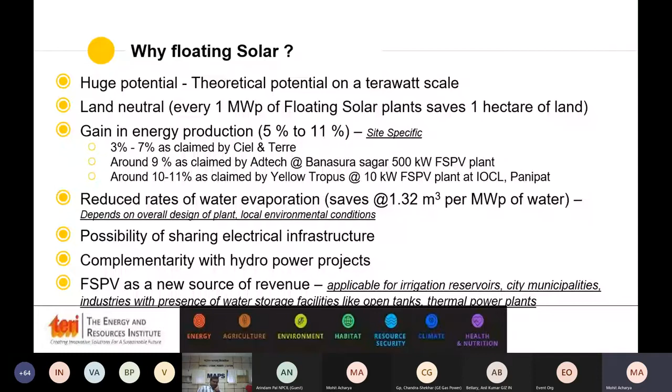Globally, the technology has reached a level of around 2 gigawatts of installation. If you look at a more detailed analysis, out of these 2 gigawatts, majorly almost 94 to 95% has been installed in Asia.

This has been installed in Asia, led by China, followed by Japan, South Korea, and Taiwan. Interestingly, when the technology was getting recognized earlier in countries like Japan and China, project capacity was in the range of less than 2 megawatts to 5 megawatts. But now larger projects have started coming up.

This reference has been there in India as well. These are a few companies who provide services like project development, anchoring and mooring supplies, or floating structures for this technology. The major components of this technology, different from ground-mounted or typical rooftop PV plants, are the addition of floating structures and anchoring and mooring. Apart from that, PV modules, inverters, SCADA systems, and transformers are all there, as in a typical solar power plant.

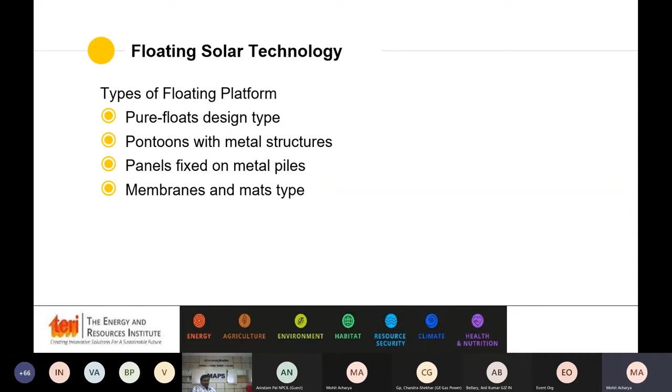Now, just to give you an idea about what type of floating platforms are being used in most projects right now, they can be categorized into 4 types. The pure float design, which is famously and majorly used in projects right now, basically utilizes especially designed buoyant bodies which support the PV modules.

You can see this type of technology in almost every project coming up right now, with different technology providers or suppliers for this. There's Hydrelio designed by Ciel et Terre. There's one more Japanese company who supplies. There's Sungrow, and one more Indian player, Yellow Tropus, who previously supplied this kind of floaters.

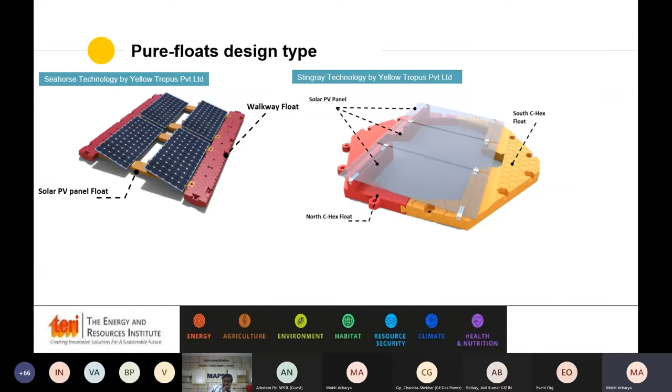Moving into the second type, the floating panels or solar modules are mounted using metal structures and pontoons. This kind of supporting structure came up in the earlier days of this technology and has been used in some projects in Japan as well as in the Netherlands. You can see here that the solar modules are mounted with the help of a metal structure on pontoons, which are used to provide the buoyancy force.

The third type, I could not refer to as floating, because in this case the entire floating solar panel assembly, in addition to the other components, has been fixed to metal piles. This particular type provides a very good opportunity to co-locate floating solar panels for generating clean energy while co-locating with fish farms and other uses of that particular water body.

There are a few projects which have been installed in China. The picture you can see is of a 100 megawatt project in a fish farm in China. The only difference here is that because of using metal piles and metal structure, the overall cost of the project may increase. But you have to choose based on the actual requirement of that particular project. If the fishing happening at that water body is generating a lot of revenue, then you can balance out clean energy generation from that area, as well as open up revenue generation from other sources.

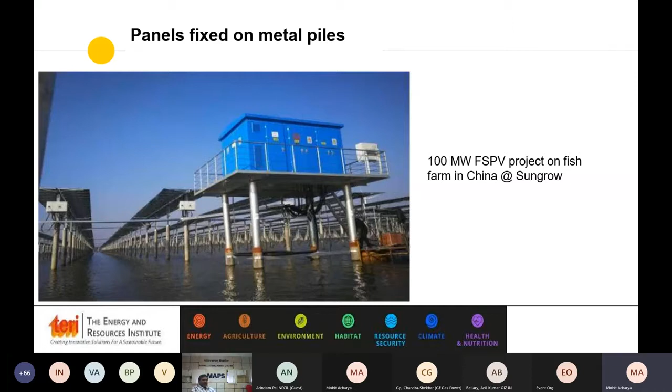The last part is basically a membrane type or mat type, in which the platform is created by covering the entire water surface with rubber mats. Basically, this type of membrane technology is particularly suitable where the water body has a lesser area, like in the case of an industrial pond, where you can cover the entire water body area.

Now, since floating solar technology is installed on the water surface, it is important to understand what role a water body plays, what type of water body it is, and what the purpose of that particular water body is. Again, it is divided into further categories. The first one, generally considered a low-hanging fruit, is the static kind of water body. These are water storage reservoirs used for industrial or process requirements, or mining ponds or water treatment ponds.

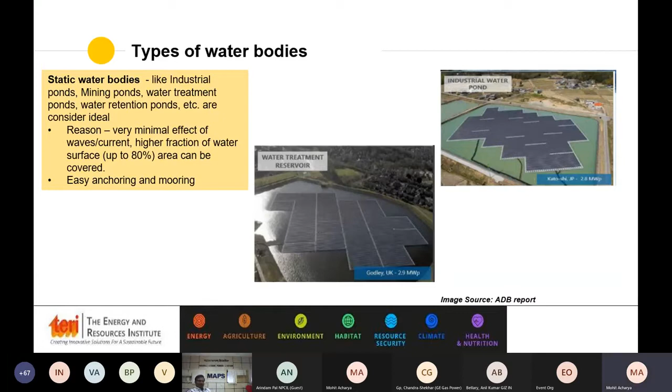The other type is large water bodies, for example hydroelectric dams or irrigation reservoirs, in which risk is moderate. This is because the area of the water body is generally high, and because of wind, wave and current effects, there could be a cyclic fatigue load coming on the floating panels and other components. Also, there is a chance of water level variation and water depth variation. One has to look at the distance from the shore, and do a thorough study of bathymetry and subsoil investigation.

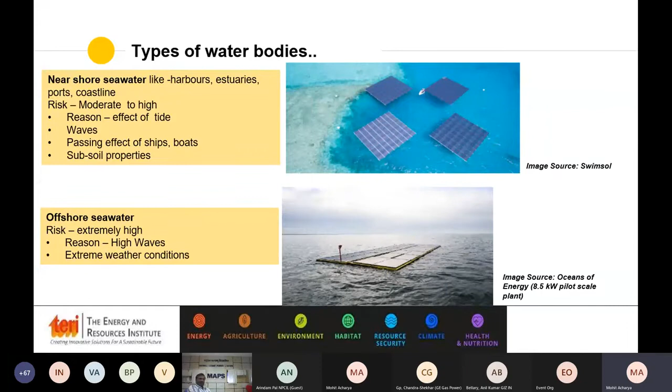The other type is near-shore seawater cases. These are particularly near harbors or lagoons near the coastlines. Here also the risk is moderate to high, mainly because of the wind and the effect of tides and waves, and also if the lagoons are near ship movement, then one has to consider the passing effect of ships and boats as well.

The last one is offshore, which looks at installing this type of technology at seawater. Till now, only very few projects have come to the concept-to-commission stage, and around 50 kilowatt to 100 kilowatt has been installed in a few parts of the globe. Currently research studies are underway on how the longevity of this particular technology can be increased, particularly in these extreme environments.

You can see a few of the projects which have been installed across various countries, like 150 megawatt in China, which is the largest plant installed in the entire world, of around 150 megawatt.

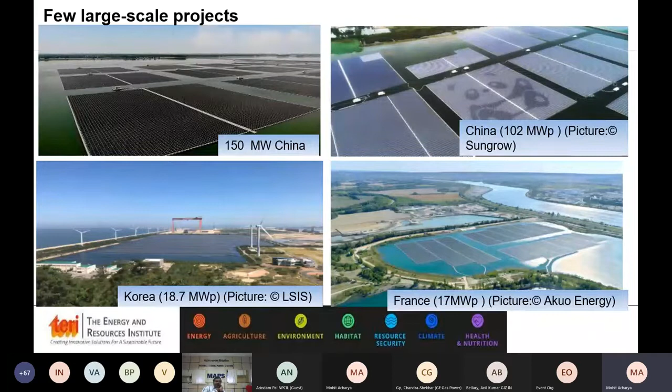Coming to the cost side, as we have seen in the case of ground mounted or rooftop systems, the cost of floating solar technology is also getting reduced as the technology matures. The interesting point to note here is that India is already discovering lower costs as compared to other countries.

Moving into the Indian status, till now 9 megawatt of capacity has been installed, and almost 450 to 500 megawatt of capacity is in the development or pipeline stage. A few of the tariffs discovered till now: last year for the Rihand Dam, for 150 megawatt, we discovered a tariff around 3.36 rupees, and last year the Bihar Municipal Corporation discovered a tariff around 4.15 rupees.

Recently, in Andaman and Nicobar, India's first floating solar plus storage project came up, and the tariff or levelized cost of that was in the range of 7 to 8 rupees, if I remember correctly.

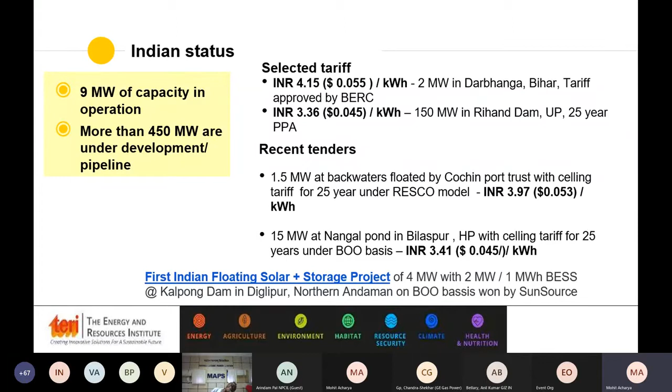Now, with the support of the Energy Transitions Commission India, TERI has undertaken a study in which we looked at the state-wise potential of floating solar technology. We identified more than 2,000 large and medium reservoirs, and conducted a thorough analysis of how much potential is possible for each reservoir. Through this study we came up with an estimation of around 280 gigawatts of potential achievable from this technology. The cumulative surface area of the reservoirs we identified is around 18,000 square kilometers.

You can see the state-wise potential over here, which is led by Maharashtra, Karnataka, Madhya Pradesh, Gujarat, and Rajasthan. Further, each and every reservoir has been estimated under two different scenarios, in which each reservoir has been further categorized based on their purpose type.

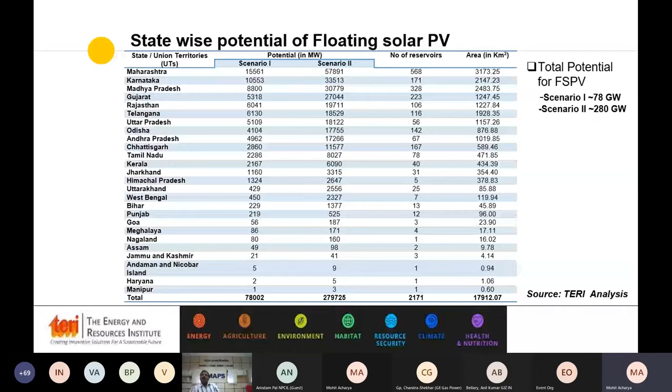The basic approach, I won't go into very much detail, because this particular approach has been well explained in the report which was released earlier this year, and I request all of you to please go through that report, and you can see what approach we have used, and what type of actual project design steps one has to take.

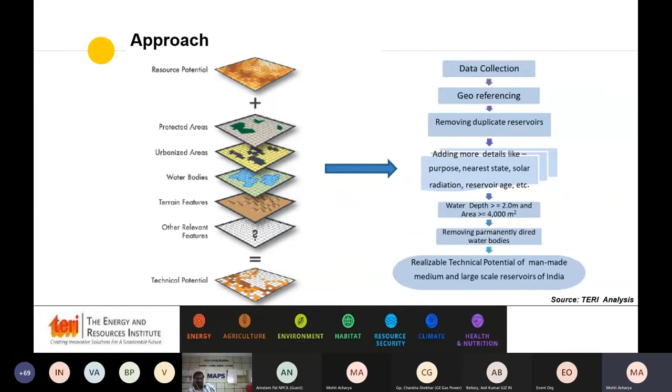Now coming into the project design guidelines, as compared to ground-mounted projects, over here I would say the feasibility stage or due diligence step is the most important one. The reason is that very limited know-how of this technology is available, and floating solar projects are more site dependent as compared to ground-mounted or rooftop systems.

So one needs to do a thorough study of how the water surface area has been changing historically, how the water depth has been changing, if a reservoir is larger, what the waves and current profile of that particular reservoir is, what the wind is, and what the bottom topography of that particular patch of the reservoir is. So one needs to do a thorough study.

It starts first, if you consider any site, with the help of GIS software, one can identify how the water surface area has been changing, and identify the patches of suitable area where the floating solar panels can be installed. Once those patches have been identified, one can do a detailed bathymetry and hydrography study there to find out the bottom topography.

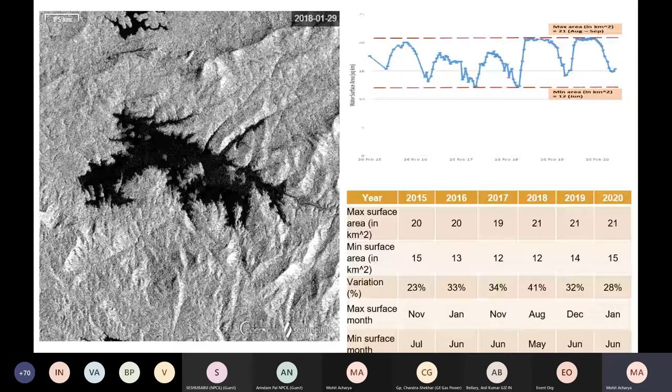Once that patch has been selected, you can go for further studies like bathymetry and hydrography. So ultimately, from the GIS study, you need to find an optimal water surface area. If the reservoir is very large, that patch should not be too far from the shore, otherwise it will increase the cabling cost and other component costs. It shouldn't be too near to the shoreline, otherwise there might be chances of drying up in the lean season. So these kinds of steps are much needed to undertake this type of technology.

Now suppose I take an example: you have a reservoir of around 100 square kilometers. Out of that 100 square kilometers, through a GIS-based study, you have identified 5 or 10 patches on the reservoir surface where you can see that water coverage is there almost entirely over 10 to 15 years, and water depth is also in the range of 10 to 15 meters.

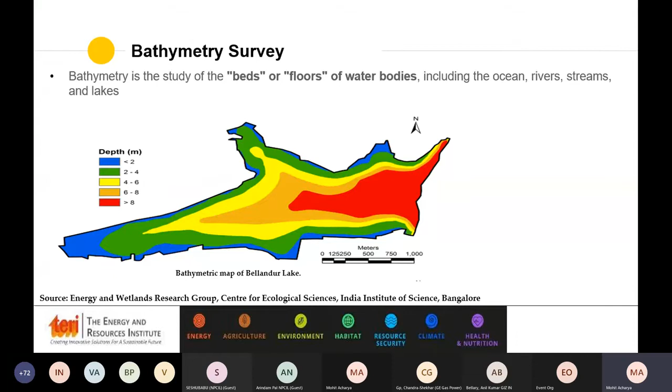So once you have that data with you, you can use the bathymetry study to find out the exact topography of the bottom surface which is there beneath the water surface. Now again, bathymetry has been done with two types of technology. That is, one is single beam and the other is multi beam. Each has their own associated cost with them.

So over here you can also devise a methodology that out of 5 or 6 patches you have identified, you can first conduct a bathymetry study with a single beam because it costs less. Once you have a better understanding of the exact profile of bottom topography over there, you can select 2 or 3 patches out of those 5 or 6 patches,

and then on those selected 2 or 3 patches of maybe around 10 square kilometers out of 100 square kilometers, you can conduct a multi-beam echo sounder survey, which can provide you much better resolution, and which can be used at a later stage for designing your anchoring and mooring points and so on.

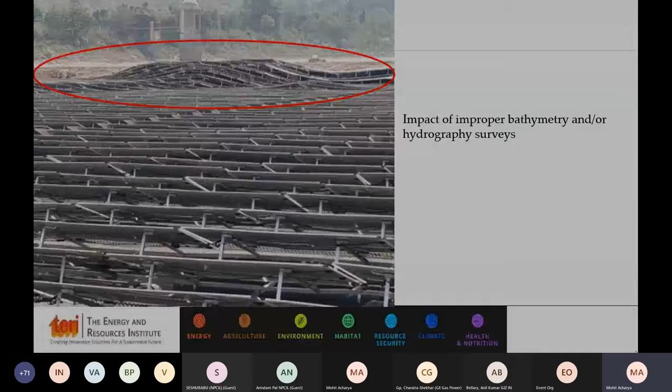The other important part that has been emphasized by SS Mishra ji as well in his presentation is the plot size. We have to understand that in principle the initial design phases of floating solar PV projects are a bit different compared to a ground mounted one. In a ground mounted one, each row acts as a single unit. So drag force because of wind is lower compared to what could be there in the case of floating panels, because each joint is interconnected, and it acts as a single unit, a single plot. So the plot size plays a very important role over here.

A larger plot size can lead you to a high number of anchoring and mooring lines, and can be hampered at the time of a cyclone or typhoon. Even if one part gets damaged, it can reduce the entire project lifetime. So as per our analysis, we have found that a project plot size of around 3 to 5 megawatt peak in one single plot is the ideal one, where the forces on the anchoring and mooring lines also get minimized.

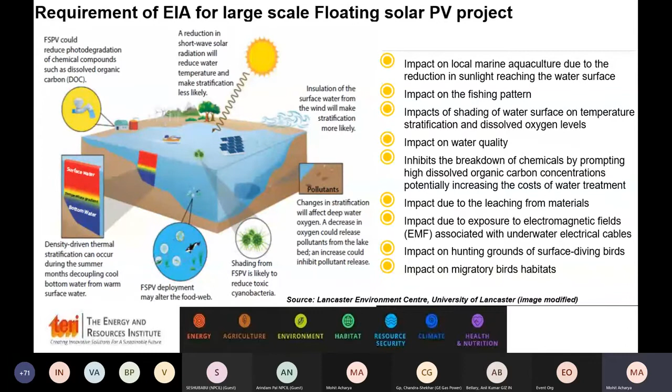Just summing up my presentation, as I explained earlier, each and every activity at the feasibility stage can be a major cost driver or can hamper the overall life cycle of a floating solar project. If one has not done the background research correctly, the entire cost of the particular project can be very high, and we as a technology provider have to consider this fact. So it requires conducting a thorough bathymetry and bottom topography study.

We also have to consider the surface soil conditions, water depth and variation. Distance from the shore also needs to be considered. Water quality, particularly salinity levels, and wind speed at that particular site. So each of these points has its own significance and has to be checked thoroughly. The important point to be considered here is that floating PV technology is more location dependent and requires rigorous due diligence compared to ground mounted or other RE technologies.

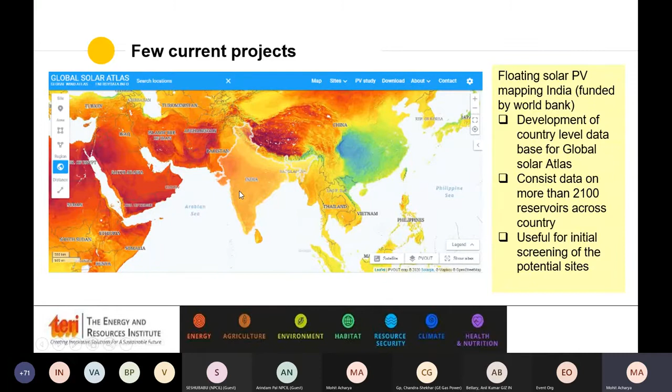So with this, I stop my presentation here. If anyone has any doubts or questions, I'm happy to answer at this point, or I can also revert back to you if you have more questions.

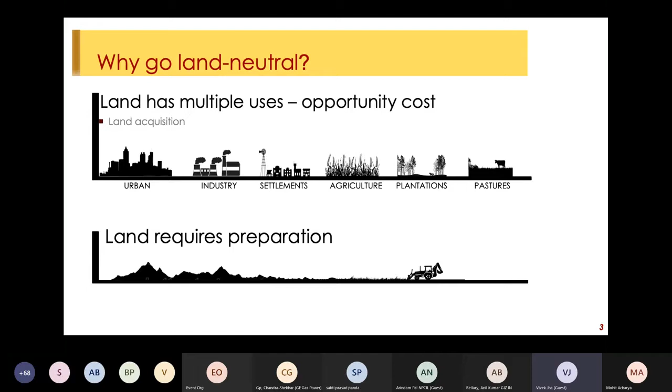Also, there is no requirement of extensive land preparation, so the project cycle can be made very effective, depending on the efficacy of the contractors working there, and the efficacy of the data that one has collected.

Also, in India, land is scarce and we are a densely populated country. How much land would we give away for solar, which could be used for multiple other purposes? There is a reality check we need to do, because sometimes while expanding solar projects, we are also encroaching on fertile land, which should never be the case. So these are the push factors.

The pull factors, as I'm sure you've heard many times, are that there are no shading losses. Dust accumulation is lesser compared to your counterparts at ground mounted and rooftop. And there is a definite gain from evaporative cooling, which can range anywhere between 5 to 10%, depending on what kind of structures you employ and what weather conditions are there in the region.

More than that, it can be very well integrated into the ecosystem. In fact, if designed well, it does not need to isolate water-based livelihood activities such as fishing, but can be very well integrated along with that. In the Mekong Valley, there is an experiment going on where they are trying to combine floating solar with fish hatcheries so you can get the best of both worlds. I'm sure there are a lot of cases that will come up in India as well, where floating solar should be and can be combined with water-based livelihoods.

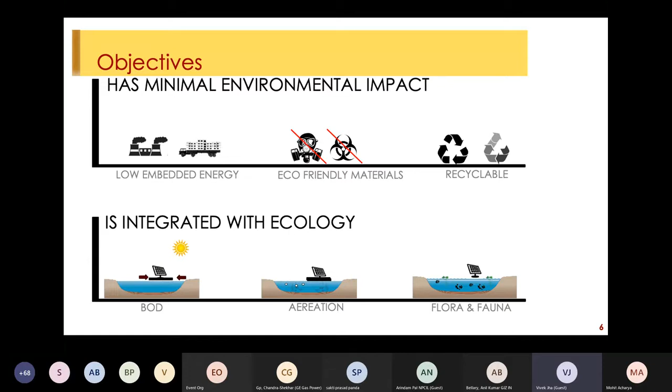Also with respect to sunlight penetration, tenders as of today in India say that maximum coverage from the structure within the area covered for a floating solar power plant should be 70%, and 30% of the area should be left free so that sunlight can penetrate. With the use of glass-to-glass modules and other things, one can look at that as well.

It has socio-cultural benefits. In fact, very recently we are in talks with inland waterways where floating solar can double up in the form of jetties and provide charging stations for running electric boats. That, to my mind, is another great business case for floating solar, because as of today a very limited portion of our freight movement happens through inland waterways. If we are able to create charging infrastructure, we can create electric-based mobility on inland waterways with the help of floating solar as well.

I'll get into the cost bit in the next few slides. So where can floating solar be done? It can be done essentially wherever there is a water body, but if we target the most fertile areas first, then large dams, village ponds, lakes in urban local bodies, and reservoirs within industrial complexes.

Within this, we have seen NTPC take the leadership, converting a lot of thermal power plant reservoirs as sites for floating solar. This is a stark difference from last year's presentation, because now we are seeing the completion of almost 300 to 400 megawatts of plants from NTPC. That will be a big win for the industry, because there will be a lot of learnings from such large projects.

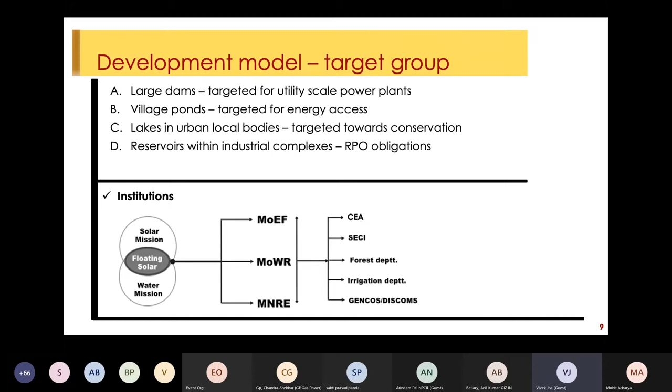And of course, village ponds, we can look at multiple business cases where we can support our agricultural and farmer background with power from floating solar. Under NREGA, about 1 lakh ponds have been created in India, each about 3 to 5 acres, which can deploy about 500 kilowatt to 1 megawatt of floating solar power plants. This will not only help reduce evaporation losses from the ponds but also provide additional energy for a variety of needs.

As the report that TERI has done on floating solar as a third pillar does a very detailed calculation of what market is available. Also in the last presentation, Mohit stressed the importance of surface coverage of a reservoir. Depending on how robust the ecology is, the surface coverage changes. If it's a raw water reservoir in an industrial complex, we can go up to about 80% coverage, because it has no attached ecosystem. But if we are looking at a lake, then 5, 6, or 10% is the maximum one should go.

After we have identified sites, and most of you are from the tendering authority side, it's important to choose sites carefully. These are a few pointers, more self-explanatory, but it's important to note that security is an important function. Secondly, it should be close to manufacturing facilities, so it should not be a remote location -- getting there itself would be a huge challenge.

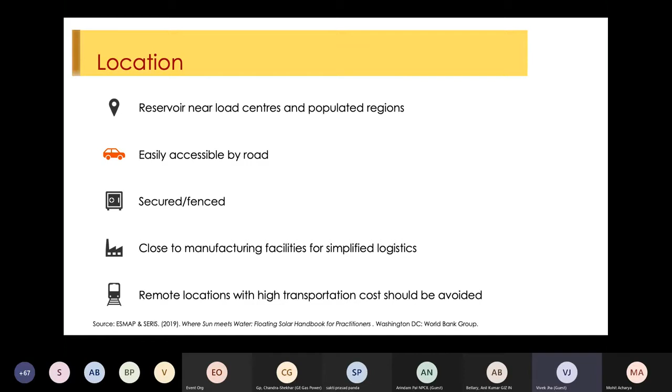If it's closer to load centers and populations, then the energy can be utilized by those load centers, so one gets a better business case. In terms of weather and climate, areas should be chosen with calm water preferably, with little wind or storm if possible. And if it's a reservoir affected by drought, this becomes an even more feasible solution.

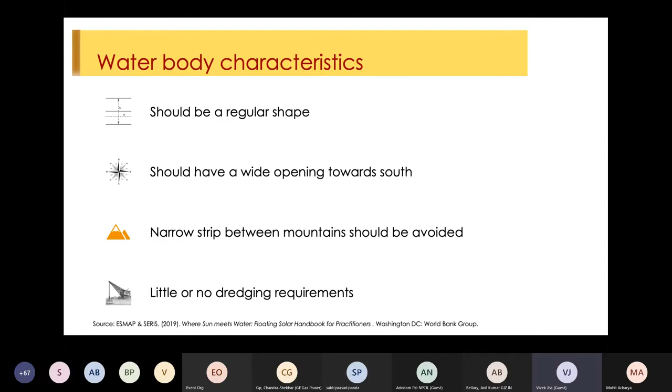The shape of the water body should be regular, not extremely irregular. If possible, the south side of the reservoir should be wider so you can maximize the potential of deploying a floating solar power plant. One should avoid areas with high terrain on either end, because that gives shadow losses -- this is the case in hilly regions where there are reservoirs, and one has to analyze how much shading loss can come because of the high terrain.

If possible, reservoirs should have shallow depth -- by shallow depth I mean 10 or 20 meters at most. We shouldn't attempt, or rather we can attempt, reservoirs that are 90 or 100 meters deep, but that will make the anchoring and mooring solutions extremely expensive, and the viability of the project itself might get questioned.

More so, the areas that we choose should have decent soil bearing capacity, so that anchoring and mooring can be planned well, and the reservoir bed, as far as possible, should be clear of obstructions.

For example, the Tehri Dam had submerged the old town of Tehri. Now, if we want to do a floating solar power plant at Tehri Dam, first, the depth of Tehri Dam is almost about 100 meters, that has to be taken into account. Secondly, because the town was submerged, there would be a whole lot of obstructions on the reservoir bed, so one will have to keep that in mind.

So low salinity water bodies would be preferred, and it should not be very far away from electric infrastructure, which in case of floating solar is an added advantage compared to a ground mounted system. Very importantly, there should be sufficient area available close to the shore, where all your electrical equipment can be deployed. You'll have the floating solar power plant in the reservoir, but extra electrical equipment such as transformers or inverters would need to come on shore. So sufficient area should be available so that all of this equipment can be placed, and a regular evacuation system can be created. Now, what is a floating solar power plant?

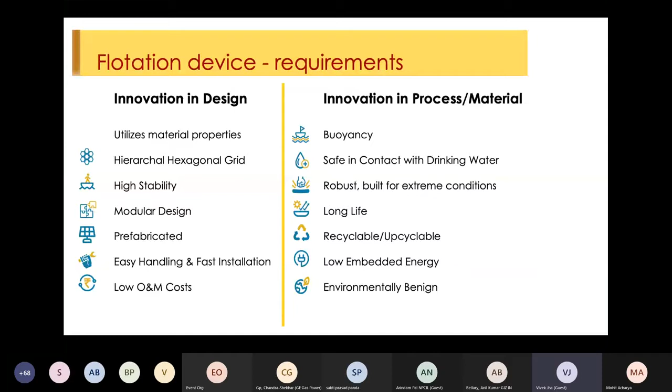But whatever the case, there is a lot of design work that needs to go into the sector, and as more projects come up and competition intensifies, there will be more design ideas coming through. As of today, thermoplastic or HDPE is probably the most used material and has decent buoyancy. There are multiple tests done on the material, which are part of the tender specification, so that makes it safe to an extent, but things like joints have to be looked at once again.

Why is bathymetry necessary? Because in a reservoir, we need to identify an area which has perennial water availability, meaning the water should be available to a minimum depth of 1.5 to 2 meters throughout the year. It should not be the case that you identify a site and during the dry season that area gets exposed to the sun, which will have implications on the floating solar power plant. Once you conduct the bathymetry, it allows you to create a DEM, or digital elevation model, based on which you can identify the area with perennial water availability because of the FRL and MDDL of the reservoir levels, and also identify an area clear of any obstructions.

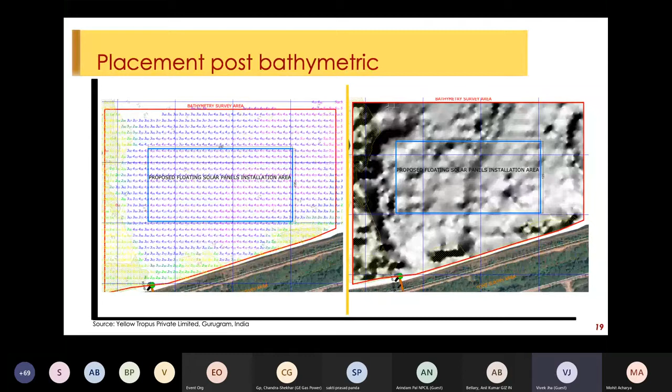Also very much required is something called a standard penetration test, which is done in case of ground mounted plants anyway. But here, the standard penetration test is done to identify the soil bearing capacity of the reservoir bed. Because if I have to deploy an anchor which has to take a load of about 10 or 15 metric tons, then I better be sure that if I put a helical pile, the soil will not give away, or else all the efforts made into the project will go to failure. So soil studies and geotechnical studies, including standard penetration tests, become very important.

Depending on the loading on a power plant, one can decide whether to use a gravity-based system or a pile. Let's say if my loading comes to about 10 metric tons, and if I decide to go with gravity anchors, the density of concrete used is about 2,500 kg per meter cube. As soon as it goes in water, the apparent weight of that anchor becomes half. So if it is a 2-ton anchor in water, it'll have the holding capacity of only 1 ton, because a lot of it will be lost to buoyancy.

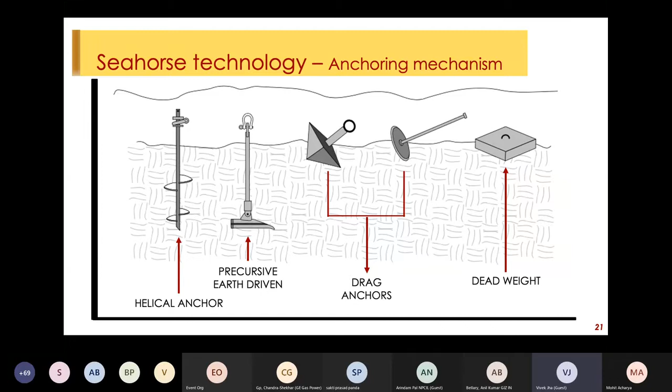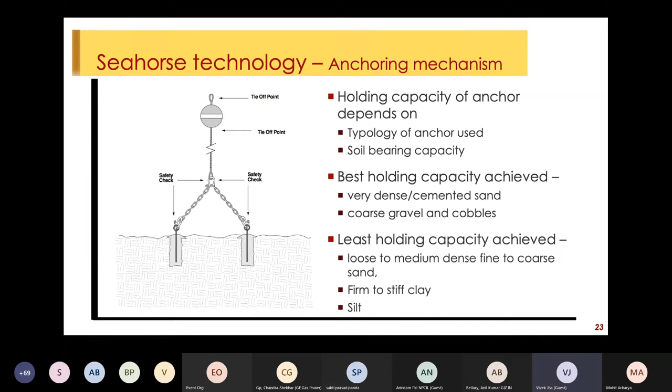Depending on the soil capacity, you decide which type of anchor you use and what will be the design of the anchor. So it is not one size fits all. Every site has its different requirements, and that will have to be calculated through geotechnical evaluations.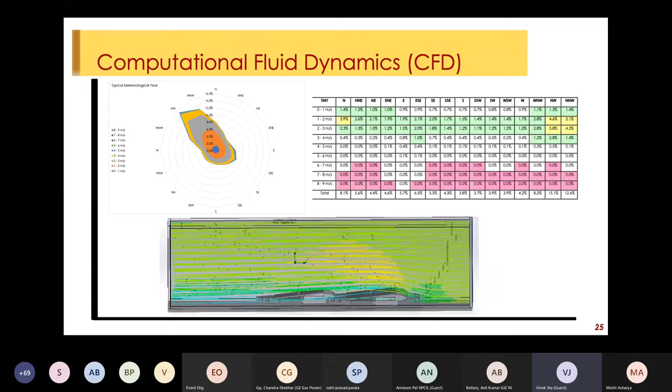What other studies are essential and need to be conducted from a design perspective, typically by the developer or the EPC? You will have to consider computational fluid dynamics to see what are the wind loads coming onto the floating solar power plant, from which direction and how much, and then accordingly you'll be able to come to a final figure of how you're anchoring and mooring, or what kind of floats you need to design.

Moving from there, once you have the data for geotechnical studies, the anchoring and mooring itself is done on pretty sophisticated software which has been developed by the marine industry over several years. One example is OrcaFlex. There are multiple softwares - ANSYS, Bentley, and so forth.

Then finally, you come up to the final design of the anchoring and mooring. Also, while designing the anchoring and mooring system, you have to take into account two things. One is the water level variation, because in most of our reservoirs, during the shallow periods, the water levels will be low, and during the monsoon season, the water level will be high. So you have to take into account what is the water level variation.

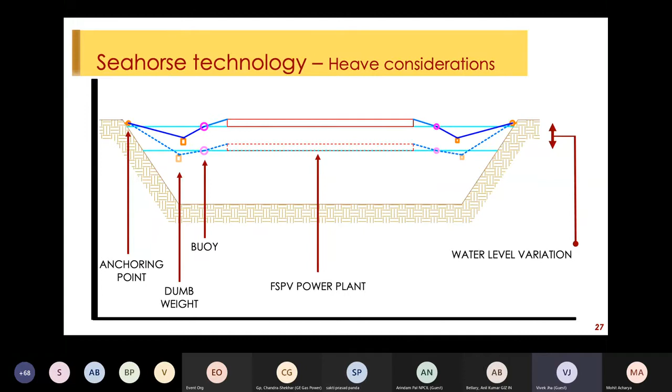As I said in an earlier slide, once these studies are done, then parallelly you also have to locate an area where assembly and storage of your floating power plant can happen. A floating solar power plant essentially gets constructed on the ground, and then it is pushed into the water. So for on-ground assembly, you need an area.

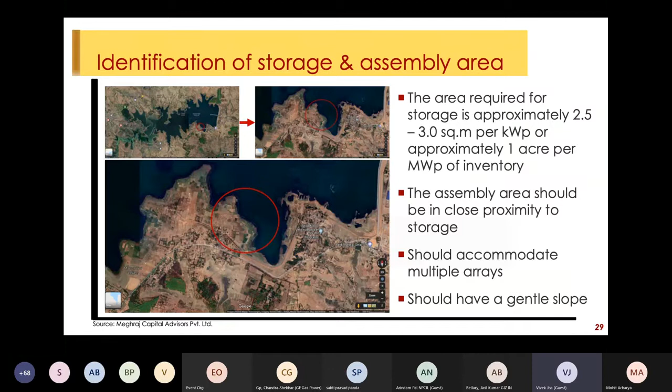So here I have given you approximately 2.5 to 3 square meters per kilowatt peak of area required per megawatt of inventory that you want to keep. And also a clear area of about 200 meters by 20 meters is required for the assembly. The more flat that terrain is, the better. On the left-hand side, you see a site identification process where you identify, based on the terrain of the land, where you can easily assemble.

Anilji, how much time do I have? Okay, never mind. According to my watch, I have about another 5 minutes, so I'll try and hurry this up.

Moving forward, there are multiple risks that are appreciable in a floating solar power plant. One is a value chain risk, because as Mohit and other speakers said, this is not an established industry. From the design of floats to the actual deployment, there are multiple gaps in the value chain as of today. So one has to take that into account while planning for a project. Please don't give very short timelines and take contingencies into account, because as the industry is not very established, some processes may create a bottleneck and take extra time.

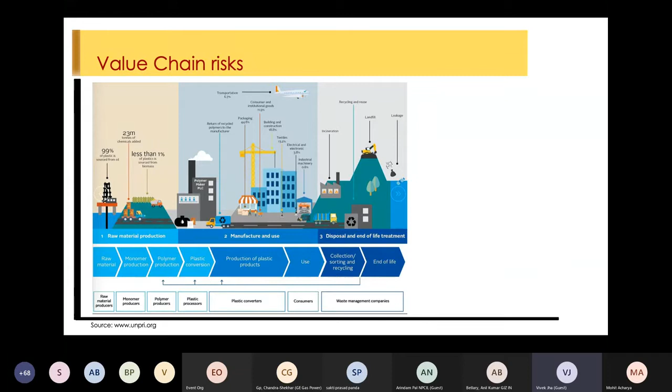Also, there is a problem with multiple contractors. As somebody asked, for hydrography you have a different contractor. For bathymetric survey, you would have a different contractor. Then for deployment on land, a different contractor, and for deployment in the water, another contractor. So there is not one agency or contractor that will give you a turnkey solution. So it's important to make sure that the process you follow while designing and executing the project is flawless, where multiple contractors can come and talk with each other and help in the design procedure.

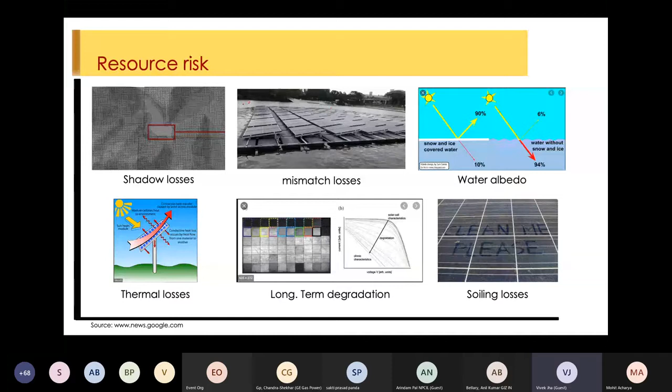There are policy risks, as many of us are very aware. Andhra Pradesh was one example last year. There are resource risks, and here it is pretty self-explanatory. The first one on the left shows what I was talking about, high terrain. And then there are mismatch losses because of waves and other factors. There can be other factors that one can take into account, that is soiling losses or long-term degradation, some of which are general to ground-mounted and floating solar as well.

There are regulatory or compliance risks. I remember a couple of years back, the Maharashtra government was planning for a large floating solar power plant. But the moment this power plant was announced, there was a lot of protest from the farmers. So an environmental and social impact assessment, though it might not be necessary as a regulatory procedure, as a tendering authority or as a developer or even as an EPC, it's extremely important that you undertake it,

because you don't want to be 3 or 4 months into the project and suddenly some risk shows itself, or some people start protesting. So all the communities and all the associated stakeholders need to be taken along while designing the project. Otherwise, one will have problems while deploying the project itself and while maintaining the project.

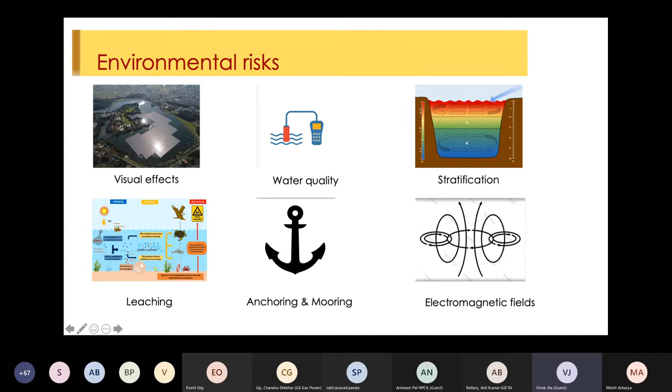There are definite environmental risks. Most of them have been explained earlier. Another thing that we do not look at, on the top left side, is the visual effect of a floating solar power plant. If you're locating it close to an airport, then it should not be very large, because you'll get a glare from the floating solar power plant, which might affect the flights coming in. Also, there are risks because of electromagnetic fields associated with floating solar power plants, which need to be taken into account.

So, in summary, I've tried to give you a whole lot of risks which are associated. There are a few risks that I haven't talked about because of the paucity of time, but there are technology risks which some of you asked about. What kind of float should we take? What kind of anchoring mechanism should we deploy? Construction risks. Is the contractor doing the project an established contractor or not? Do they have the right track record?

What are the operation and maintenance risks? How often do I need to look at the anchoring and mooring system? Once in 5 years or once every year? And what if there is a sudden storm? How will I maintain the plant?

And finally, something that has not been talked about in policy circles is the decommissioning risk. We are putting a lot of plastic in the water body, which is HDPE. What happens 25 years down the line? Who is going to recycle the entire plant? Is the plastic used in the floating solar power plant being recycled by the developer, by the component manufacturer, or by the tendering authority? So these are some questions and risks which are associated and which one has to see.

Finally, I'll leave you with a bit of good news. We did a plant at IOCL, on an industrial water body, and we compared the electricity generation to a rooftop plant about 100 meters away. Within a period of about 4 months, we saw a gain of 8.3%. This essentially means that if you design your project well and the site conditions are right, you can get a definite gain from floating solar, which means the cost of floating solar can be 8.3% higher than the cost of your rooftop system and still be viable.

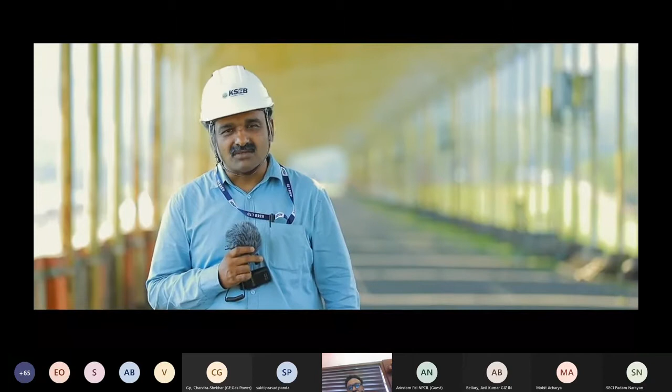Good afternoon. On behalf of Kerala State Electricity Board, I welcome you all to the virtual tour of Banasura Sagar floating power plant. Before I move to the plant, I request my colleague, Mr. Anil, who is looking after this dam, to give an introduction about this dam. After that, we will move to the actual location we are all eagerly waiting for.

Welcome to all. The floating solar power plant, 500 kW, was the largest one in India when it was commissioned in 2017. This plant is located in the Kuttiyadi Augmentation Reservoir, which is commonly known as Banasura Sagar Dam. Before moving to the plant, we'll just discuss the common technical features of this dam and augmentation scheme,

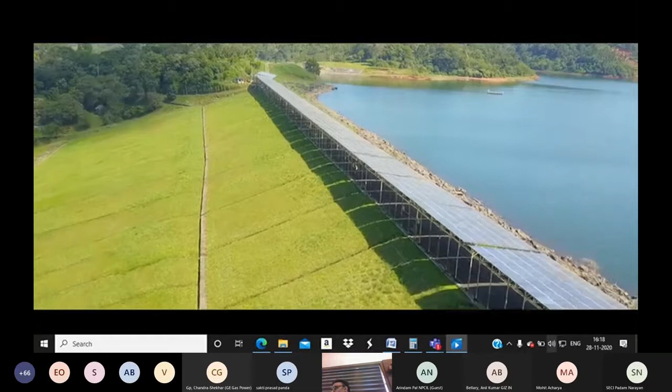commonly known as Banasura Sagar Dam, which is situated on Karamanthodu, the largest tributary of the Kabani River, which flows through Kerala, Karnataka and Tamil Nadu, then finally ends in the Bay of Bengal. It is the second largest monolithic earthen dam in Asia.

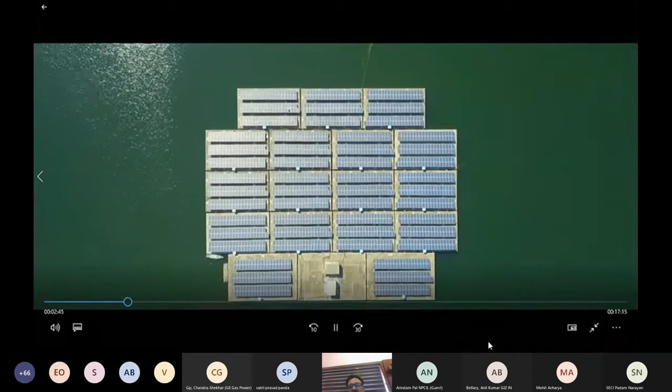Welcome you all to the 500 kilowatt Banasura Sagar floating power plant. I'll quickly move to the complete plant, wherein we are standing in front of the panels.

Just to give you the idea, we have totally 17 floats, made up of ferro cement, on which our plants are located. Every plant has approximately 23 modules in series, one string has 23 modules, and we have 5 such strings connected to a string inverter. After that, from this string inverter it goes to the AC panel. From the AC panel we have another transformer, then it is stepped up to the 11 kV level, and from 11 kV it goes to our grid. This is the basic idea of our plant.

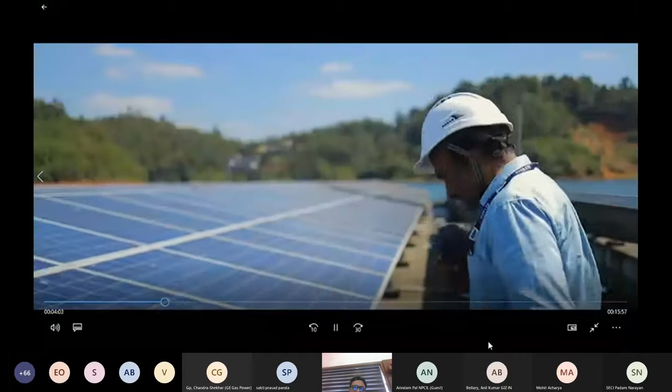We are now moving on this floating panel. This is actually our ferrocement plant, and it is very stable compared to other HDPE floats and all. This is very stable, that is what we found. It's just like we are moving on normal land, that is the advantage of this ferrocement, where we have no vibration at all. Whatever energy this solar plant produces, if it is vibration free, then we will get the complete output. That is the advantage of this plant.

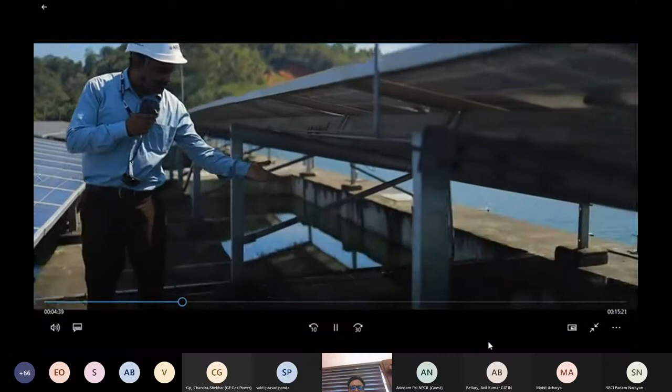Also, what I wanted to show is this water - this plant is placed over the water body, so the cooling effect is direct, so the plant is getting cooled. This is one of the advantages of placing our panels as floating solar. This is the design, you can see the water, and above which our panels are there, so that the temperature of the panels comes down. We know that the output voltage, or output power, is inversely proportional to the temperature of the modules. So temperature is less when it is placed over the water. This is the design here.

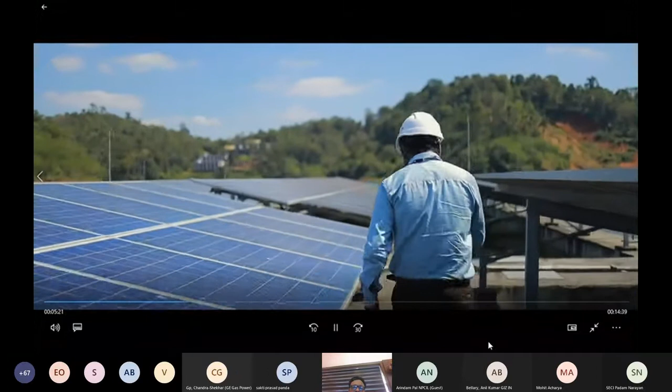Let's move quickly to the inverters. I already told these are the modules, and we have 23 modules connected in series, and 5 such strings. One string has got 23 modules, and then we have 5 similar strings, all connected to one string inverter of capacity 30 kilowatt. Let's move to one inverter and we'll see it, then we'll move on to the control panel.

This is our earthing strip, and this earthing strip is actually in every float. It is surrounded in the water, and this earth we are taking directly and connecting to the remote. We are not putting this down and earthing it here. We are taking this earth completely and earthing it at the remote shore. This is how earthing is done. I'll explain it when we reach the plant.

You can see the gap between these two floats. As you all know, the solar plant is to be placed facing south, and this angle is approximately 15 degrees as per our design. You can see the structure here as well - this is the structure part on which the panels are placed. This is, as I already told, over the water body, so that the panel is cooling down because of this water.

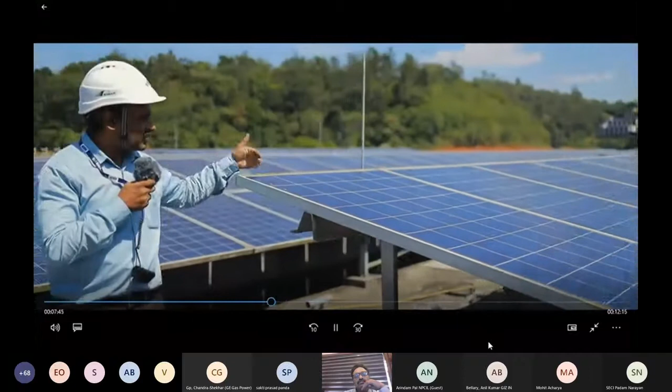One more thing I wanted to say - if we can place water, that is what the literature says, if you can sprinkle water in one way or the other, then the temperature of this panel will go down, which will in fact improve the efficiency of the plant. This is what we are also planning on an experimental basis. We have to try putting some water continuously, sprinkling or whatever way, and we are planning to do that to increase the efficiency of the plant. The water will be coming throughout so the temperature will come down. When temperature is less, you can see that our efficiency will go up.

This is our main central float. I have already told that we have 17 floats, and apart from the 17 separate floats, we have a single central float on which our control panel, SCADA system, and transformer are all placed. The peculiarity of this plant is that the DC to AC conversion is done in this plant itself, so that we are evacuating AC from here, not DC. DC is only coming up to this point from all the floats.

It is being brought to the inverters. From the inverters, the inverter will convert DC to AC. We have the inverter here, an ABB make inverter. From the inverter it goes to the AC control, from where we have a transformer which will come later, and then it is going to the nearby shore where we connect to the grid.

This is our inverter, a string inverter of 30 kVA ABB make. I don't want to go in detail about the inverters, because the difference between a floating solar inverter and a normal inverter used in a land-based solar plant is minimal. It's the same thing, except this is a string inverter with a single input, like 1 MPPT.

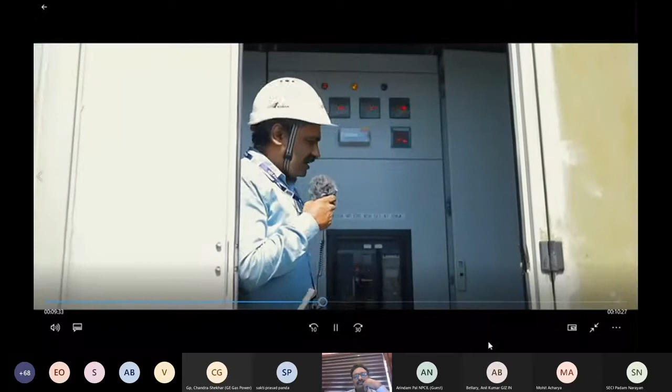Let us move to the panels. This is the AC panel, and all the inverter output is coming to these HRC fuses. For every inverter you have these 3 phases connected to the HRC fuse. From the HRC fuse it's coming to the breaker. We have 2 sets here - half of these inverters come here, and the rest come over here. From here it goes to the LV circuit breaker.

We have relays also connected on the AC side - overcurrent relays as well as earth fault relays. We also have voltmeters and ammeters which show the actual power. Apart from this, we have SCADA, which gives you accurate power details. Let us move to the HV side.

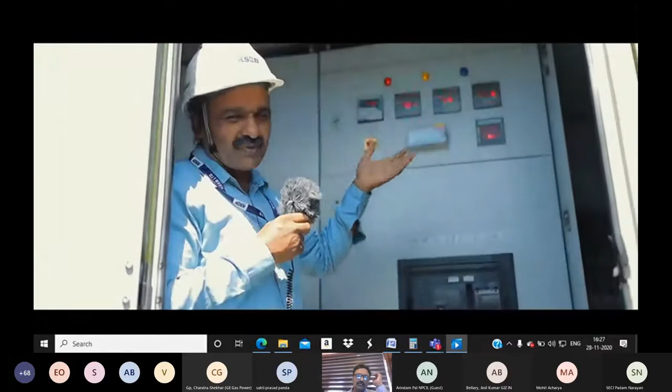As I told you, the peculiarity of this plant is that the conversion from DC to AC is done here itself, and from here the voltage is also stepped up to 11 kV - that is, 415 volts is stepped up to 11 kV here. Let's go to the transformer where it is being stepped up.

Moving on to the transformer - this is our transformer, a 415 to 11 kV transformer. We are connecting the LV side star and earth, and the HV side is delta connected. This is the way it's been connected, and you can see the earthing here - this is the earth point.

This earth is actually directly taken to the shore through a separate earthing cable. The reason for taking this to the shore is that we do not want any earth fault current to flow through any fault site, and we don't want any potential to rise here during a fault. So we designed it such that all fault current will go directly to the shore, as if we brought that earth here directly, so we will not have any health hazards or voltage issues when there are faults in the 11 kV system.

Another main thing is the evacuation cable that you can see here. This is our evacuation cable, coming out from the transformer. It is an 11 kV evacuation cable, specially made for this usage in this water. Through this cable it is going through the water, and from there it is going to the structure there, the 11 kV structure, through which it is being evacuated.

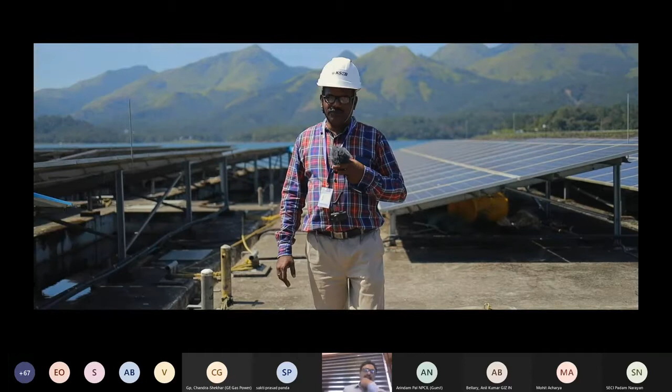Inside the platform is hollow, and only a 2 centimeter, 20 mm wall is there - bottom, 4 side walls, then top cover. It is also a small concrete wall. Actually, this concrete is made up of ferrocement concrete. The concrete is reinforced with 3 types of reinforcement.

One wire mesh, second chicken mesh, then inside 6 mm rods are there as temperature reinforcement. That is the peculiarity. Then every piece is separately constructed, then jointed. The sides and top are jointed afterwards. That is the method of construction.

Before concluding, I will show you, because for the safety of this plant, it is designed based on wind velocity. One additional security feature for this mother platform and the other platforms is, to avoid any possible ingress of water.

We are marking some lines inside and outside the platform, 3 lines, and continuously monitoring the water level of the float. Then we are bailing out water with the pump. That is the additional feature we have provided here.

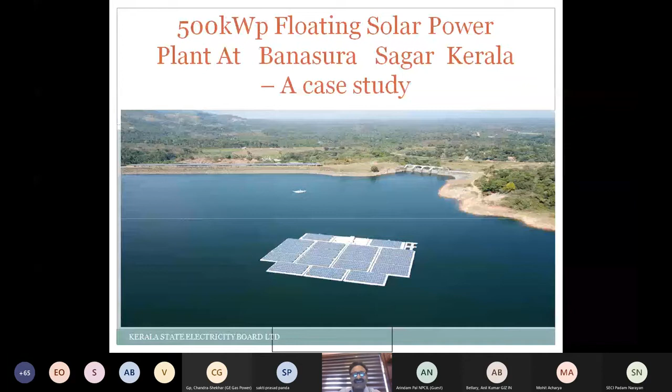So this is all what we have seen. I do not want to go much into it. Now we will see the important points regarding this floating solar power plant. At present I am not working with this, it's now 2-3 years over, but it's still in memories, and I'm now into rooftop solar plants in Kerala.

One point to be noted is we started thinking about floating solar power plants in the year 2013, when some students from an engineering college near Wayanad came up with a floating solution using ferrocement floats. We later took this up - it was near our plant, a 10 kW plant, and that was successful. Then we moved to the 500 kilowatt project using ferrocement.

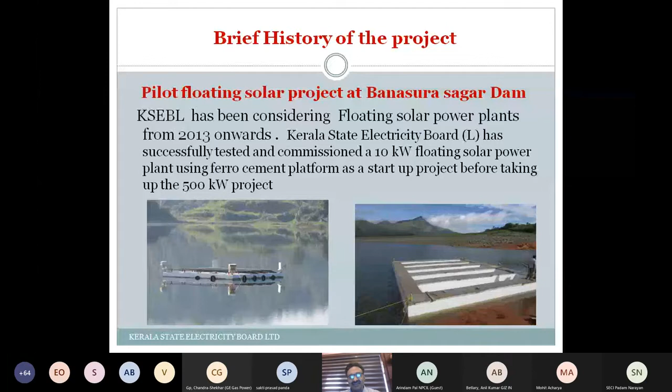We had the worst ever floods in two consecutive years. We should have taken photographs or video to show the world that the plant actually stood successfully through this flood situation.

I don't want to go into methodology and all that, it's been discussed a lot already. Now, why floating solar? Everybody has discussed this, and it's almost the same point, but still a little different thought.

Fossil fuel-based plants require less space and the energy produced is continuously available. In order to replace fossil fuel-based plants - meaning normal plants with nuclear plants, gas, diesel, or coal plants, whatever.

So in order to replace fossil fuel or nuclear power plants with renewable energy sources like solar power or wind power, we need to address two distinct problems. The first is the large land area required for solar power plants compared to conventional plants. The next problem is the storage issue of solar power plants as compared to conventional plants.

A viable and practical solution for the availability of land can be solved if floating power plants are used instead of land-based plants - that is the advantage. It's been told in one way or another by the other speakers in this.

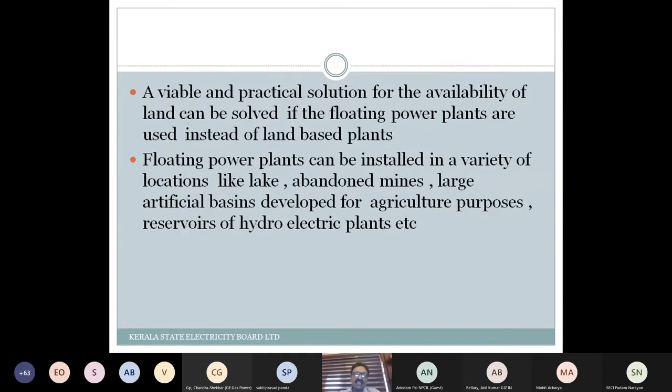Floating power plants can be installed in a variety of locations like lakes, abandoned mines, large artificial basins, and all these have been talked about. Sea water is another possibility, but using the sea is challenging, associated with heavy tides, salt corrosion, as well as power evacuation compared to other locations.

The issue of storage, which is a common issue of all renewable energy, but floating solar plants with a pumped storage plant is an ideal solution for the storage of electricity. This is the core of this presentation - if you use a pumped storage plant with the floating plants, then the water pumped during day hours in the pumped storage plant can be used in the night hours.

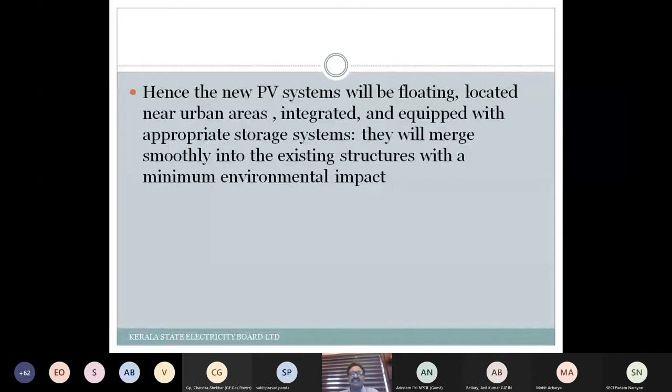Hence, new PV systems integrated and equipped with appropriate storage systems will merge smoothly into existing structures with minimal environmental impact.

Now the floating power plant requirements, I'll go quickly. This should have modularity - a modular structure must be built either at the location or at a remote place. In our project, we did it at the same place where we had the shore, and we transported it through water to the exact place.

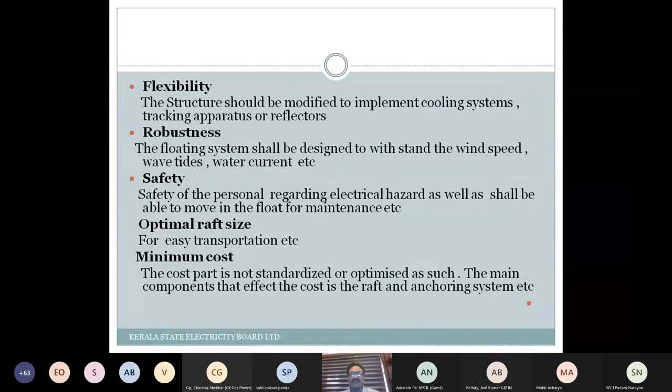Flexibility - the structure should be modified to implement cooling system, tracking apparatus, robustness. The floating system shall be designed to withstand wind speed, wave tides, water current, safety for personnel, optimal raft size for easy transportation, and minimal cost - that is the final, but most important part, the cost of this.

I don't want to go in detail on the salient features, as that's been covered by other speakers. But to say this - see, you have some points.

I think this may not have been discussed so far - if you use tracking with the floating solar power plant, it's much easier compared to land-based plants, and the energy gain is approximately 15 to 20%, even 25%. All other points have already been discussed by other speakers, so I don't want to repeat. And another point is reflector and gray energy.

With reduced cost of tracking system in floating power plants, the use of a concentrator for reflected energy is more economical, which in turn increases the efficiency of the plant. The concentrator is used to concentrate light waves and direct them towards the solar plants. That is more economical, that is what the literature says.

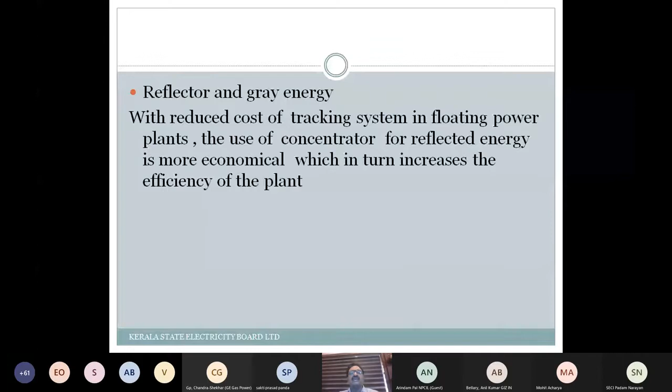Now we go to the major components of the Banasura Sagar floating power plant. The float is made up of ferrocement, and there is a mooring and anchoring system. We'll discuss how it has been done. Then modules, string inverters, all these things are there in all the panels, I don't want to discuss that. Earthing, lightning, weather monitoring - all these are there too. The important part is that the platform is made of ferrocement float, and then the mooring and anchoring system, which keeps the ferrocement float in place.

Another important point is regarding the grid integration of the generated energy, and how we have done it. And of course, as everybody has told, there is no standard procedure so far - we have not evolved a standard system for what is the best possible floating power plant.

Whether we can go with the land-based transformer setup or place it on the float - in fact we have placed it on the float because our floats are very stable, since we have gone ahead with ferrocement floats. Even though it was costly, the important point we have noticed is there is no fluctuation at all. Absolutely, because last time when people visited, they would remember it - it's absolutely like a land-based plant, so there is no vibration or anything like that.

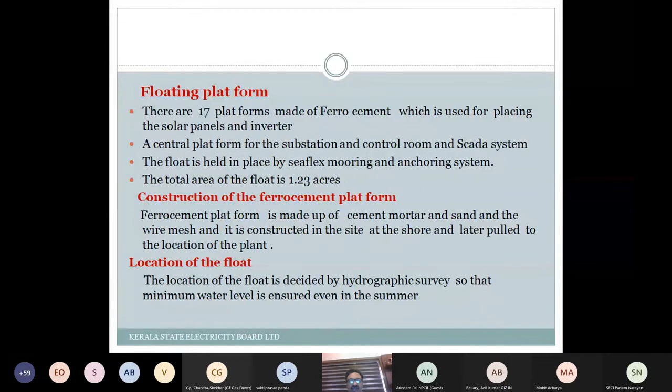A hydrographic survey was done to identify the location where we can place the float, because you should see what the water level is, and the statistics of water over the past 10 to 15 years, to find out the variation in water level, so that we can design our anchoring and mooring system accordingly. That was done through the hydrographic survey.

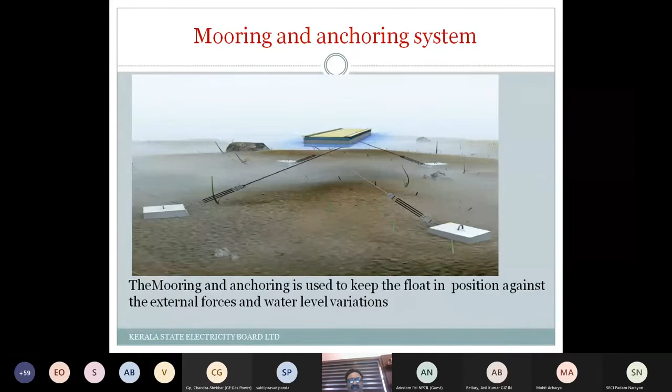This is the basic mooring and anchoring system. The system is used to keep the float in position against external forces and water level variations. That is what has been done.

This project uses, as I think Mr. Franco has already mentioned, Seaflex. Seaflex is a Swedish company. I forgot this. That company has done the design for the Seaflex, and it is for mooring, adjusting for water level changes while also taking care of forces. That is what has been done.

You can see the photograph of this here. I'll take my pointer. See, this is the concrete block. This is actually placed in the bottom of the water. Approximately 6 tons of weight. This is made on the shore, and it is transported. Transportation was very, very exciting. Unfortunately, we don't have a video of that. It was brought to the place where it should be.

It was transported over a balloon in the water from the shore to the place, and when it reached the exact place, they just broke the balloon, and it has gone down and stayed in the place where it should be. This is the way.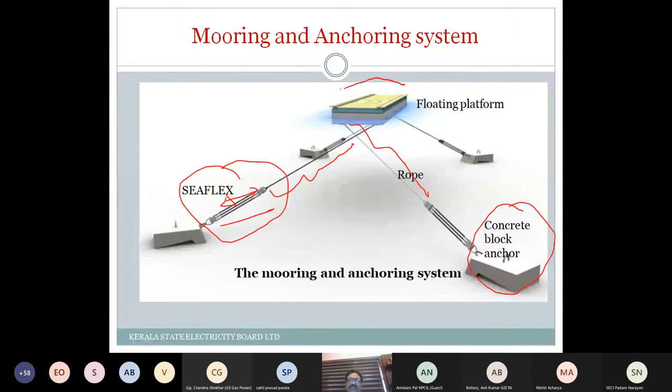Then you can see Seaflex here. This is a Seaflex, and what it does is the adjustment, because water level is going up and down. So this gives you the adjustment. This is a rope like this, you can see there, here it is written ropes, and this is the platform. This is the idea of mooring and anchoring.

And the technical details: maximum wind speed is 32 meters per second, at 10 meter height. That is normally what literature says, the height of the wind to be considered while designing this. And 32 meters per second, I think it is 115 kilometers per hour. That is the maximum wind speed considered. Depth at lowest water level is 15 meters.

And the water level variation is, you can see here, approximately 20 meters. And wave height is 0.3 meter. And water current is not being considered here, because it's a reservoir where there is not much water flow.

Methodology for calculating the forces acting on the flexible Seaflex mooring system. The method is based on British standard. Force due to wind is the first force considered. Wind forces are considered 10 meters above the ground. Then forces due to waves. Then forces due to current, not considered in this project. This is normally considered, but the current here is very, very less.

Then, as Jha has pointed out, there are a lot of software application programs used for finding out the design, which type of Seaflex they wanted to use. So the system is based on British standard, and below is a short summary. Dimension parameters and the structures of the floating systems are first set. How to do it? Determine the total exposed area. The wind pressure is calculated. The wind pressure together with the total exposed area gives the wind force acting on the structure.

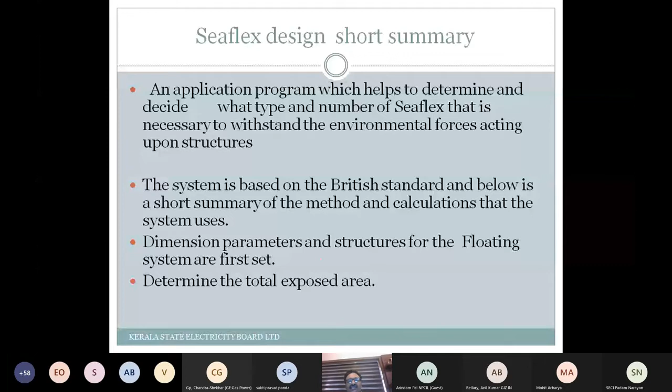The total horizontal force acting on the structure is calculated as the sum of wind forces and other added extra forces, wave and current forces. This is important. The force in the mooring system is calculated from the total force. Type and amount of Seaflex is determined. That is how they do the design calculation. It's a brief idea of how they do it.

And this is the actual final layout of our system. You can see our float here. This is our float, and this is the first one, A1, and you have A2 here. These are all the positions of the anchoring, where the concrete blocks have been placed.

This is based on what they did: they found the area, and they found out the type of Seaflex to be used in the area. This gives you an exposure of what is being done when the float is to be placed. This is the idea of this.

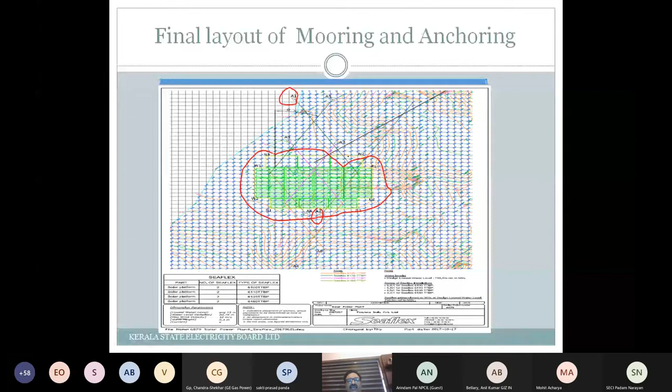Then placement of PV panels. I come to the plant again. This we have already explained. This is placed over the water, and that we have discussed. And this is about the electrical diagram.

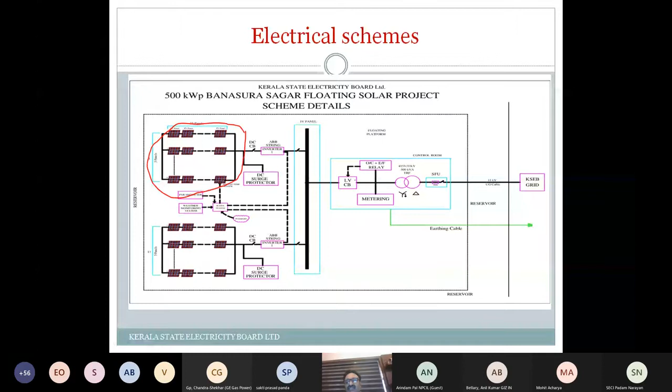The electrical diagram is this. You can see there is not much difference actually. These are our panels. This is one float, and you have like 17 floats, and one is having an approximate capacity of 30 kVA, and then the string inverters are there. Then it is going to a bus, then LVCB, overcurrent relay, then a transformer, and to the grid. And this is the specification of the PV module.

I don't want to go into details. Configuration of PV modules, this is also not of much importance now, because there is not much difference. 11 kV substation and grid integration, grid connectivity. This is a different thing, and it is not normally seen in the plant, in the float, but because we had sufficient capacity in the float, we have gone for that.

The advantage is less losses, because the voltage itself is converted into high voltage like 11 kV, so that the losses are minimized in this case. That is the advantage of this. Of course, it may go one way or the other way. It is different, but here we had that advantage. The 11 kV substation with 415 V/11 kV, 500 kVA star delta power transformer is placed on the central platform, and grid synchronization is done in the float.

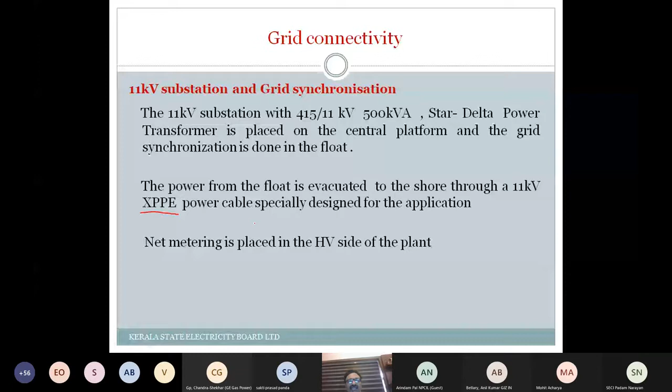Power from the float is evacuated to shore through 11 kV XLPE power cable specially designed for the application. The special design is that it is water resistant. That is what the cable manufacturer says. It is water resistant, it's not marine cable. Basically, marine cable is not being used. Net metering is there itself. Then the cable management system we have already discussed, I don't want to go in detail. String inverter, that is also technical details which I don't want to go into.

Earthing challenges. This is another important point which we wanted to see. When we placed the transformer in the float, we had a big challenge. When there is an 11 kV fault, where is the fault current going to go? The initial design which the consultant had given was marine earthing, the current to pass through the water and back to the shore. But as you know, even the LV voltage is a danger to human life. We thought it is not okay to go ahead with such an earthing system, so we thought about what is to be done.

And we know that when there is a fault, this platform is just like an earth. So current is going to go, the potential is going to rise, step potential and touch potential are going to come, so the people standing on top of the float platform are going to be in danger. We wanted to avoid all those things. So finally we came to a conclusion: we took the insulated cables that we have shown in the virtual tour and directly connected them to the shore, so that there is no voltage rising in the float.

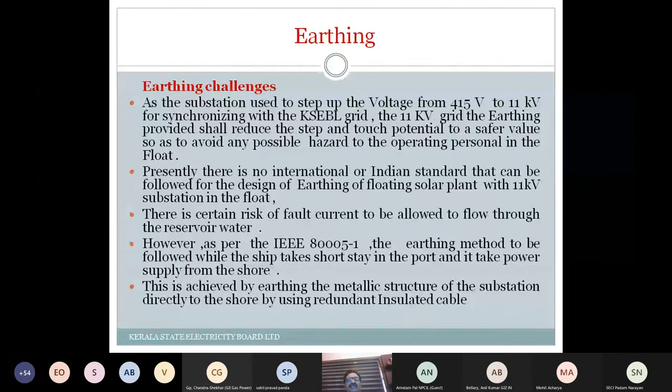And if there is any breakage, then the power should be cut off. That is what the standard says. This is what has been done during our design. Then the SCADA system, of course, I had talked about.

Then I go to the comparison of floating solar and dam top solar, because we had the opportunity. We had a dam top solar which you would have seen. I could not mention it because this is the first time we are doing such a virtual tour. Maybe next time we will make it better.

So we have done that study, and we have found out the energy, because it is similar type of modules. It is polycrystalline modules, same types and similar time. I mean, commissioned with 1 or 2 years difference, and we have found out that this is the advantage we have got.

Comparison, relay and protection, of course, there is not much difference whether it is land-based or floating. Your relay is going to be affected when you have renewables in the system, because this renewable current is going to come in your fault current, and the coordination time, when we talk about the overcurrent relays, will be lost. That calculation is to be done when you integrate to LV systems. The coordination of relays is lost because of the current coming out from the solar plant.

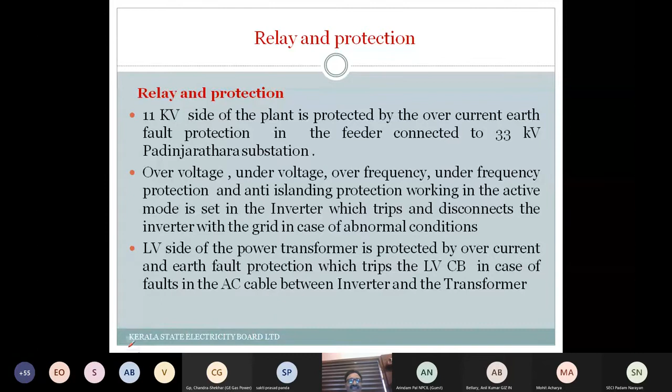Now I'll go to the conclusion quickly. I'll just read it out so that I don't lose any points. Details of the floating power plant and its installation on the ferrocement boat have been discussed in this report. The solar plant and the 11 kV substation are placed over the ferrocement platform, and the DC to AC conversion is done at the plant itself, as a result of which there is savings in the cost of DC cable. As the power is converted to MV 11 kV alternating current, power loss is reduced in this typical design.

The mooring and anchoring system used in this plant has proven to sustain the recent heavy floods in Kerala. When you have unexpected floods, what is going to be the condition of the HDPE panels, that is to be discussed. But as far as our ferrocement plant is concerned, it was very stable. There were no issues at all. Even though the cost of the ferrocement plant is higher than that of the HDPE panel, the ferrocement plant is made on site itself, which is certainly an advantage in difficult terrain.

In this typical design, the 11 kV substation is placed over the float, and the float has the flexibility to place a bigger capacity, as I had already discussed. Less space is required. Another is that the floating solar environment, especially in the reservoir, will be comparatively cleaner than that of a land-based power plant, and hence the maintenance cycle can be reduced.

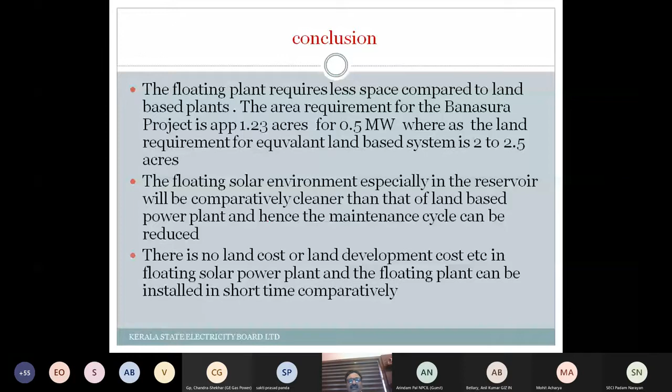That is an advantage of the plant. There is no land cost or land development cost in a floating solar power plant, and it can be installed in comparatively short time. The power evacuation cost of the plant has been discussed already, that's a common thing. The shadow in the reservoir is comparatively low in our case because the depth of the reservoir is not much; if the reservoir depth is more, the shadow will be more. But what we see is we are getting generation from 7 to around 5:30, 6 o'clock. Floating plants, if used in cooling reservoirs, will have the advantage of less water evaporation. That's been discussed, regarding PV modules.

Then, future improvements and suggestions based on experience. Even though floating solar plant efficiency increases with reduced panel temperature, there is a large difference noticed between ambient temperature and module temperature, especially during the peak time of day. An automatic cooling system using water from the reservoir, operating based on temperature information from a sensor, can be used to bring down the module temperature and improve plant efficiency. As I discussed, when module temperature is higher, for every 1 degree of temperature you get a voltage difference of about 0.4 to 0.5 percent.

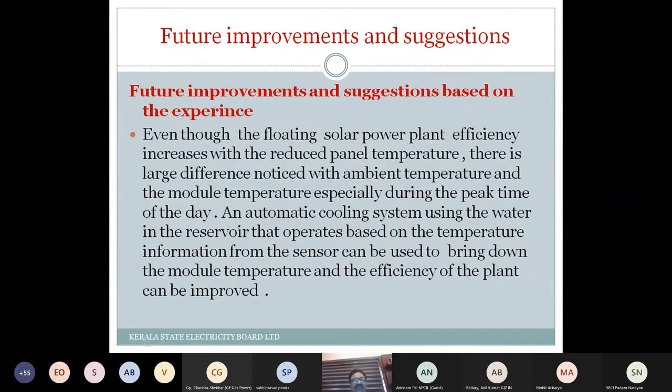Then, equipotential earthing, achieved by connecting the metal parts of the floating structure to the remote shore, is very vital for the safety of operating personnel. Hence, introducing an earthing monitoring system connected to the SCADA, which monitors the condition of the earth, can be used to further improve safety. Water level variation and flow velocity variations are important factors in mooring system design. Hence, while identifying sites including dams and reservoirs, these factors have to be analyzed.

The transformer used for the power should have a K factor; that's a normal thing when you do solar plants. Regarding anti-islanding, here there was an issue because we had a delta-star transformer. So when one phase of the delta side is open, the star side is still on, and we had some problem identifying anti-islanding. That is another issue yet to be solved.

Taken as the last point, not the only one, is the project cost. We had estimated the cost at that time; it was coming to around 10 rupees for one unit when we calculated, but the actual cost was high. One thing though, there was no competition at that time when the project was done, absolutely no competition. We had only two competitors, and the competitor with the HDPE quoted more than the one for the ferrocement, and that is what happened, finally it went to this. I don't know the details, but competition was low. I think someone has to do some research on this.

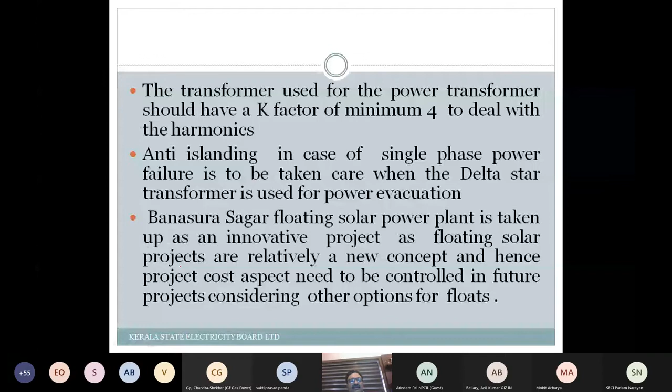Another point to be discussed, last but not least, is that the minimum water level requirement is a constraint. Every year during summer you will have unutilized storage of water in the reservoir, because you cannot bring down the water too much, or the float will sit on the bed, and lifting it up will be very difficult or impossible. So we have to keep some water in the reservoir so that the float is not in danger of sitting on the bed. This is a disadvantage, because that much storage will be lost, which could otherwise be used for hydroelectric power generation. That is the last point. If you use high efficiency panels, the space requirement of the plant can be considerably reduced, and cost can be saved. This is my presentation.